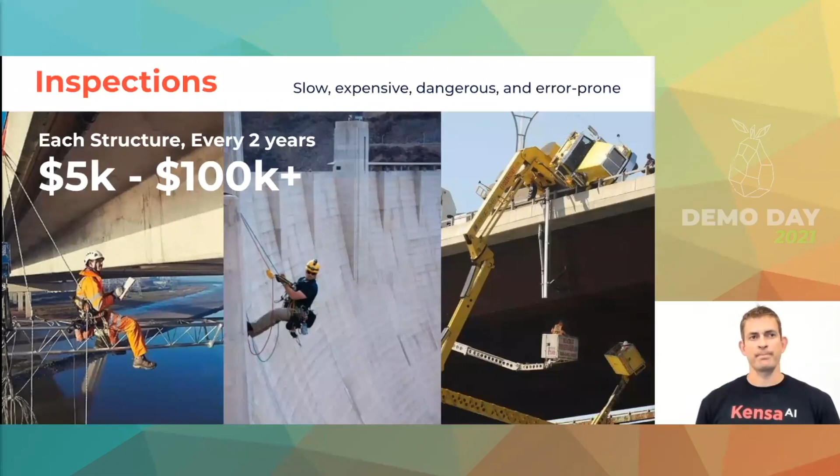Typically, large structures like bridges and dams are inspected by climbers on ropes or bucket trucks. It's a process that's slow, expensive, and dangerous. Each structure needs to be inspected once every 2 years at a cost that ranges between $5,000 to $100,000 or more, depending on its size.

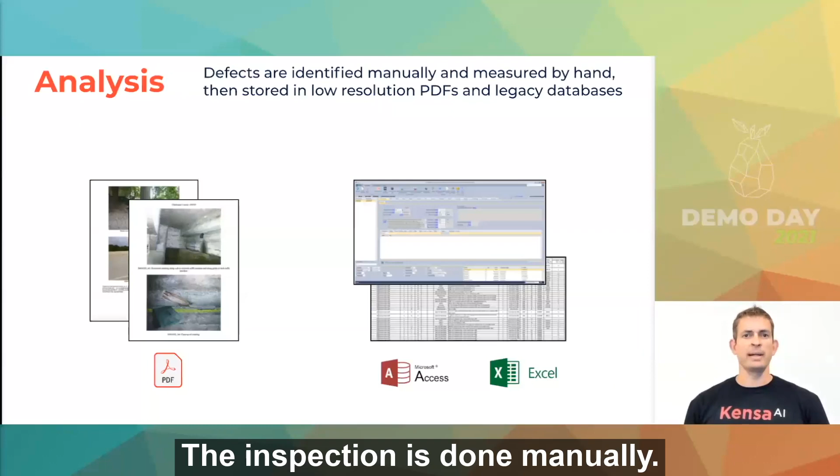The inspection is done manually, usually by someone hanging off the side of the structure, identifying defects with the naked eye, taking measurements by hand. Critical findings are stored in low-resolution PDFs or legacy databases, sometimes forgotten about until the next inspection 2 years later.

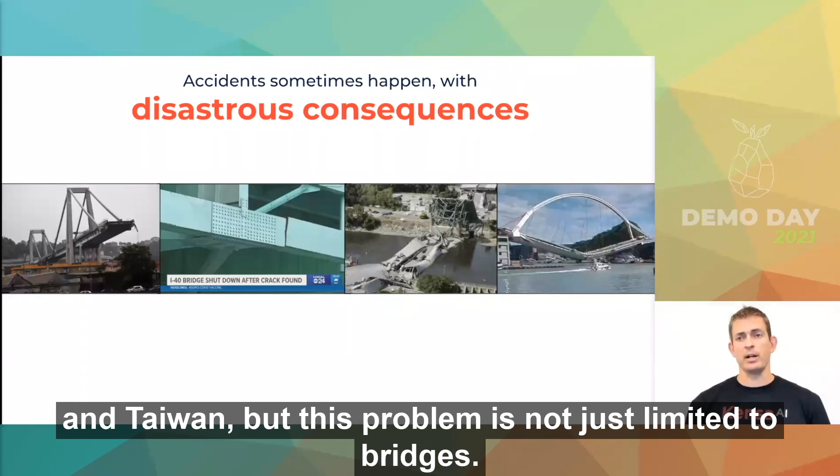As you can imagine, accidents sometimes happen with disastrous consequences. These are some examples of recent bridge failures in Italy, the US, and Taiwan. But this problem is not just limited to bridges. We're seeing it across almost every type of infrastructure that we build.

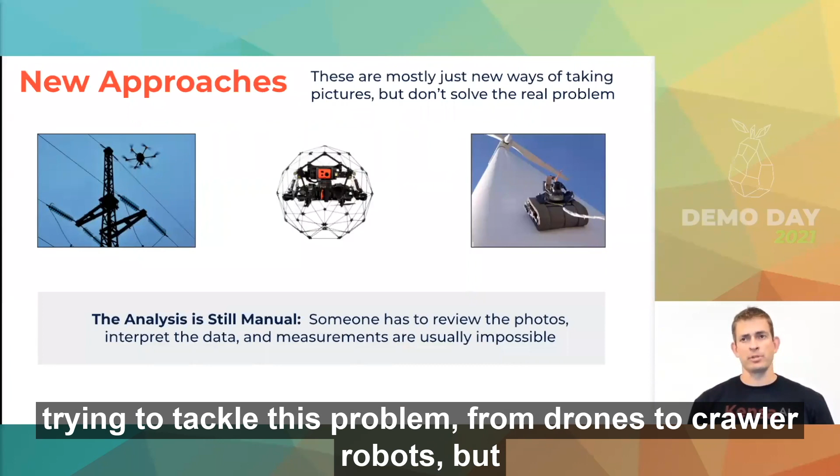Some new approaches are trying to tackle this problem, from drones to crawler robots, but essentially they're just new ways of taking pictures. They don't solve the core issue, which is that the analysis is still manual. Someone has to look through all of that footage, interpret the data, usually go back out to the site and climb it to get measurements. And ultimately, we're not getting better at this as a society.

We're Kensa AI, and we're going to solve this problem. We've built a new type of software that enables automated visual inspections with AI.

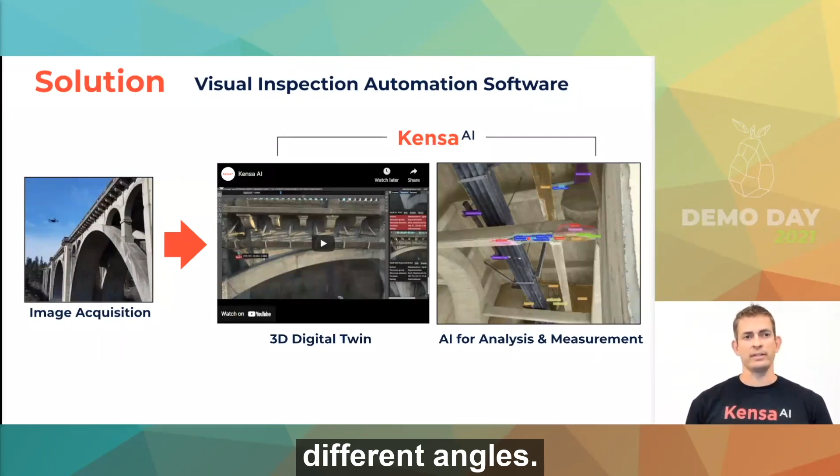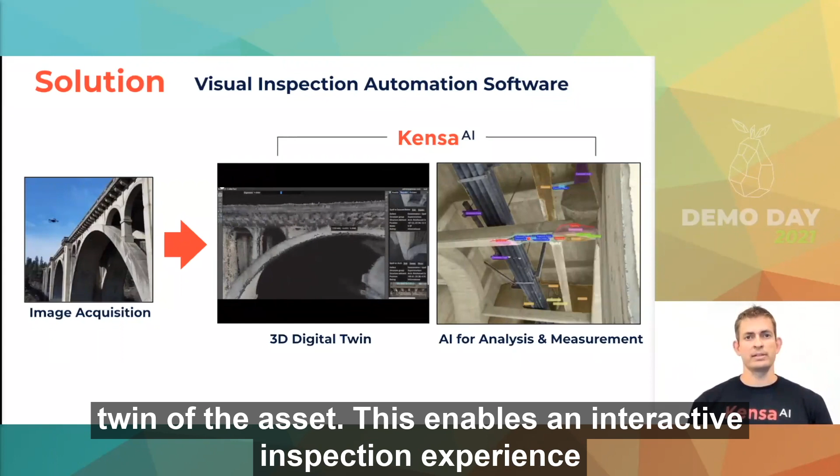Here's how it works. A customer or partner goes out and visits a site and flies a drone or uses a camera to take thousands of photos of a structure from all different angles. Those images are then uploaded to Kensa AI, where they're processed and stitched together into a 3D digital twin of the asset. This enables an interactive inspection experience where you can take measurements and get everything you need.

AI models and human inspectors then review the photos, tag damage, generate reports, and ultimately can track changes over time.

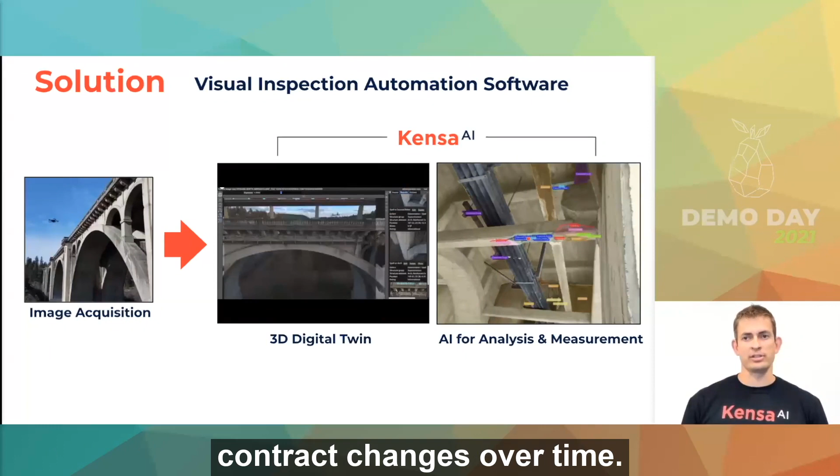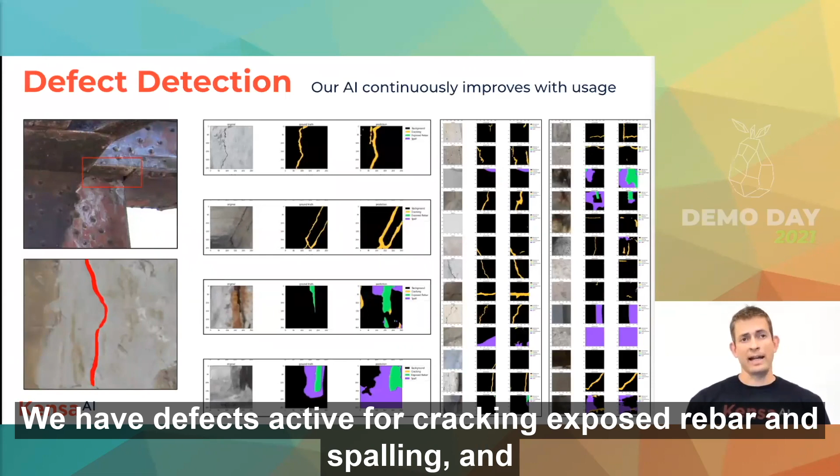Our AI is currently best in class in the industry, and it's only getting better the more it's used. We have defects active for cracking, exposed rebar, and spalling, and more coming online in the next 2 months. Soon, we'll have covered all the major defect types for concrete and steel.

Our team is comprised of industry veterans in this space. The three of us have previously been running a startup called Prenav, building an automated drone for inspections. We know how to solve this problem.

Our customers are some of the largest owners and builders of infrastructure around the world and include BNSF Railway, Lockheed Martin, IHI Corporation, and a telecommunications customer. To date, we've digitized and inspected 130 structures, and we're only just cracking the surface.

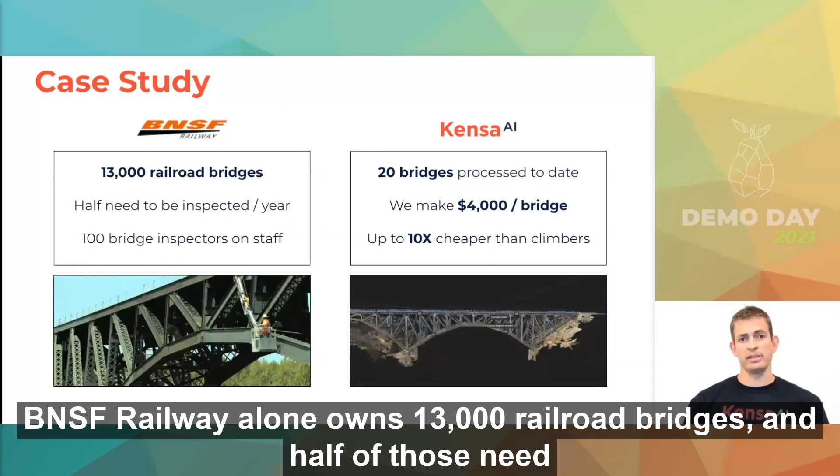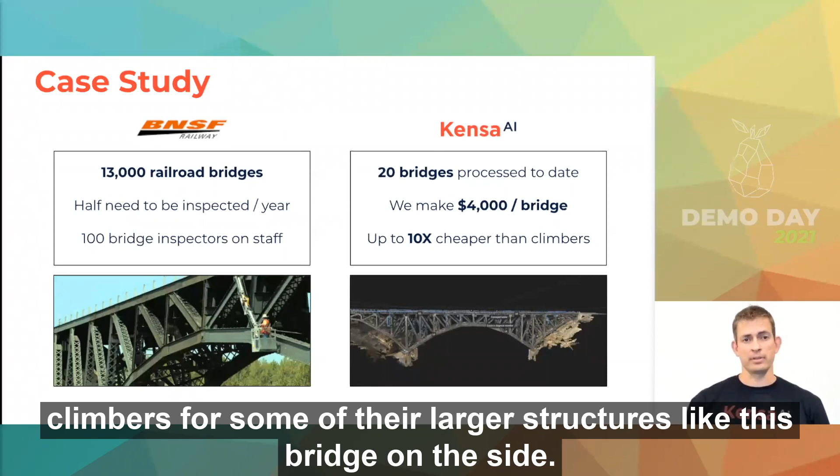BNSF Railway alone owns 13,000 railroad bridges, and half of those need to be inspected each year. We've done 20 of them so far in 2021, and we make an average of $4,000 per bridge. That's up to 10 times cheaper than climbers for some of their larger structures, like this bridge on the slide.

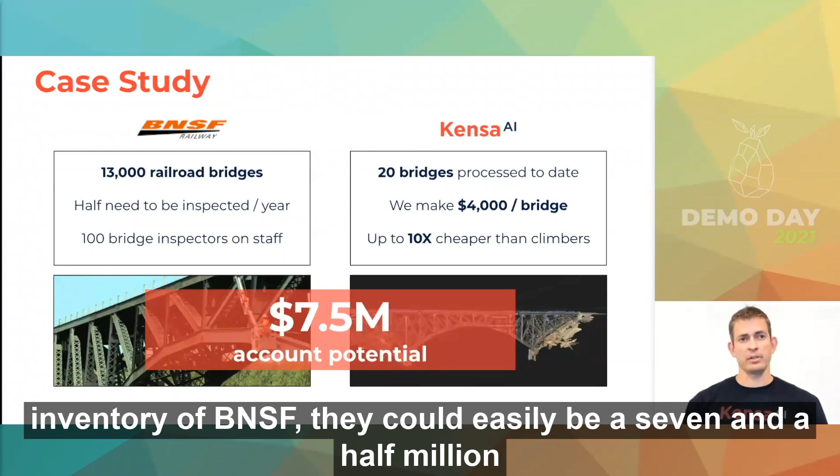If we extrapolate that value of $4,000 per bridge to the entire inventory of BNSF, they could easily be a $7.5 million account for us, and that's just one customer.

Our business model is software as a service. We charge an annual subscription fee based on the number of structures to be inspected and hosted on our platform. The average cost per structure comes out to around $500 to $5,000, again, depending on its size and complexity.

Kensa AI is growing rapidly, and we're on pace for $800,000 in revenue in 2021, and Q4 is shaping up to be our best quarter yet.

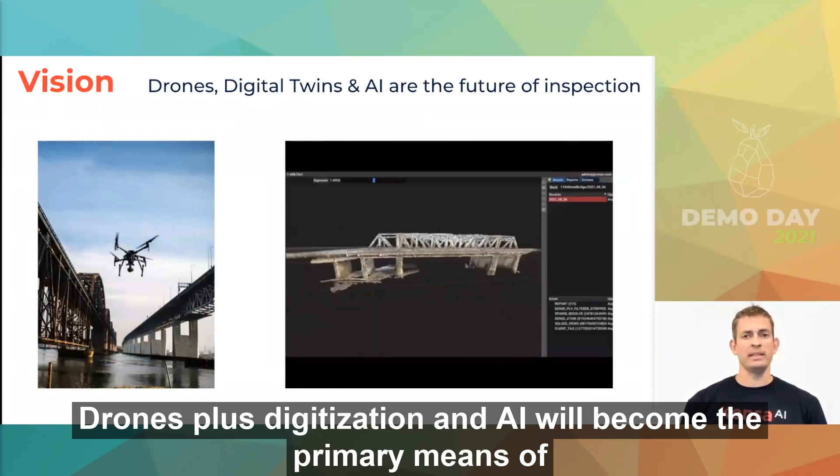No question, in the coming years, drones plus digitization and AI will become the primary means of inspecting critical infrastructure. And while there are many companies building and flying drones and designing new crawler robots, Kensa AI is positioning itself to be the most trusted, most accurate, and most automated way of processing all of this data, ultimately keeping our infrastructure safe.

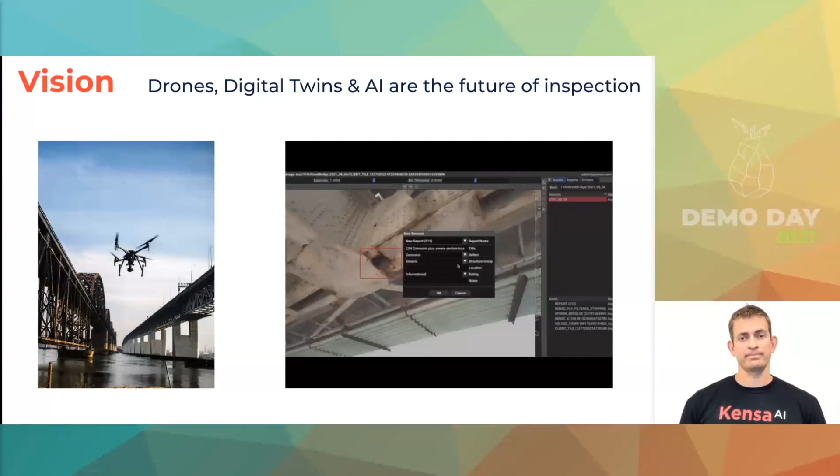We believe this is an opportunity that is equally as lucrative as it is important.